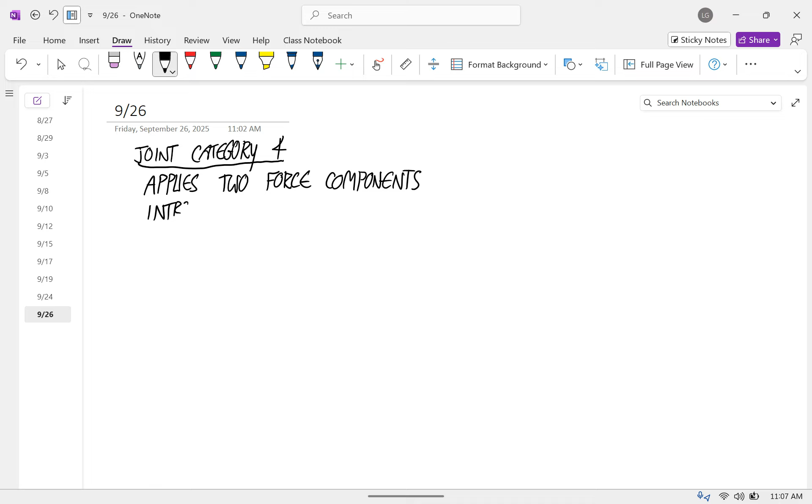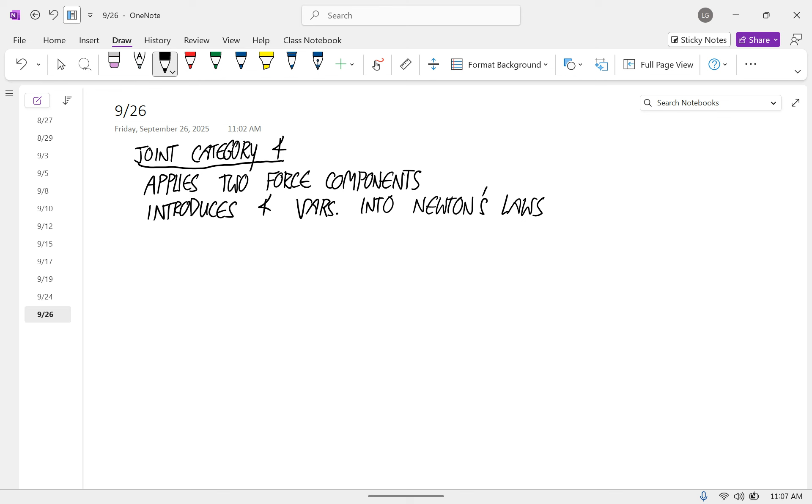And that means that it introduces 4 variables into Newton's laws. And what else was I always saying? That it eliminates 4 degrees of freedom. So it eliminates 2 translational degrees of freedom and 2 rotational degrees of freedom.

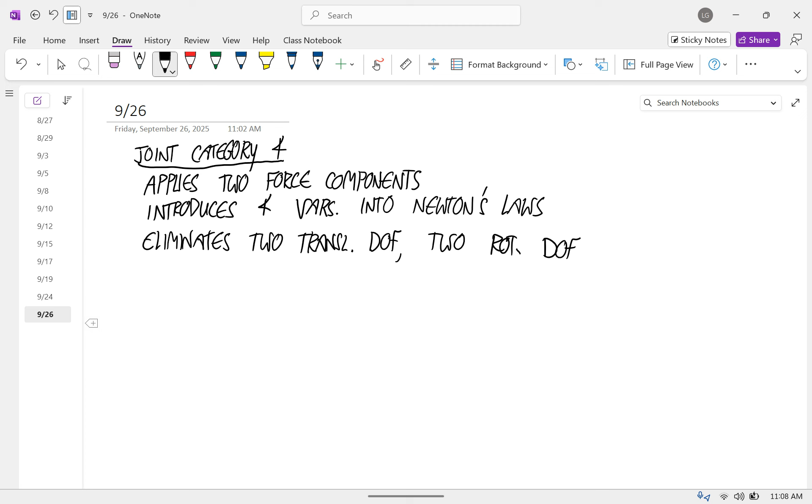And there's only one of these. And it is a pin joint without thrust. And what is thrust? Thrust is a force along the axis of rotation.

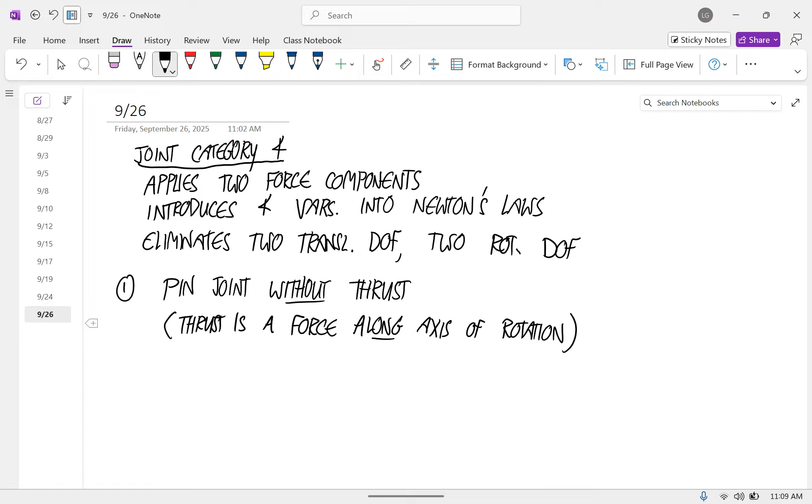Okay, so I'm going to try to draw this. So let's say we have one body like this. Man, I'm bummed out. I used to have a 3D printed one of these, and it made it so much easier to explain what was going on, but somehow I lost it.

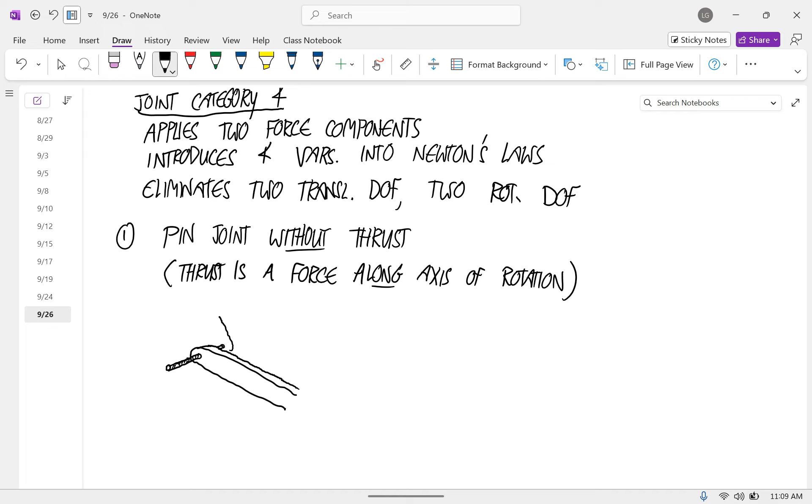Okay, so there's a pin joint without thrust. Let's say this is body 1 and this is body 2. And I've drawn that axis as really long, and I've drawn those so that they're not touching each other. They're only touching the axis. I've tried to make that really explicit in that picture. And so the idea there is that these 2 bodies have some room to slide along the axis.

Okay, so there's no force restricting their motion along that axis. The axis being long and those 2 things being separated like that has the effect of not applying thrust, because they can just slide freely. Remember that forces and couples are only applied when they eliminate motion. So if this motion along the axis is allowed, there's no force there.

And so I'm going to draw a free body diagram of body 1. And it looks like, so there's the body. So this body, think about what, so imagine this two being fixed or whatever. Think about what motions are eliminated by this joint, okay? Can this thing move, let's say the x-axis is sort of this way.

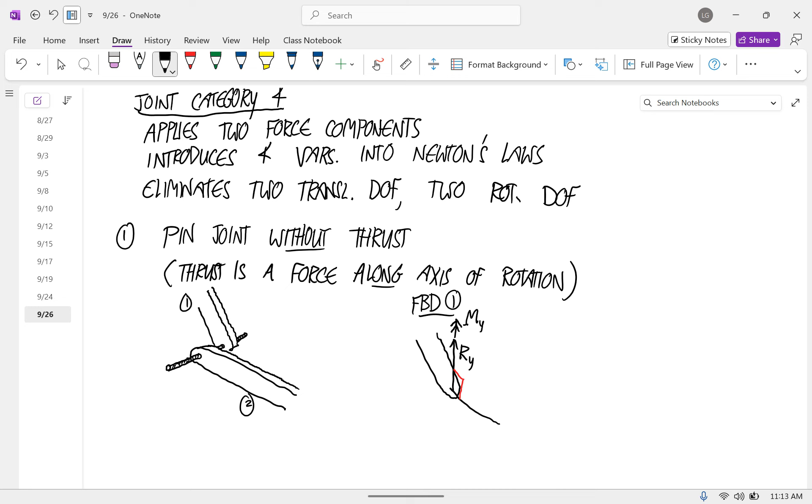Think of the two arrows as indicating the two forces of the couple. Okay, so we'll call this My. And then perpendicular to that along the x-axis, so these are perpendicular. We have a force vector this way, that's Fx, and a couple vector this way, that's Mx.

And then you could also write these with the subscript notations: F12x, F12y. I'm going to make this F, not R, just so it's the same vector. Sorry about that. Okay, so those are the four loads that joint applies. And if you went to body 2, those would be equal and opposite.

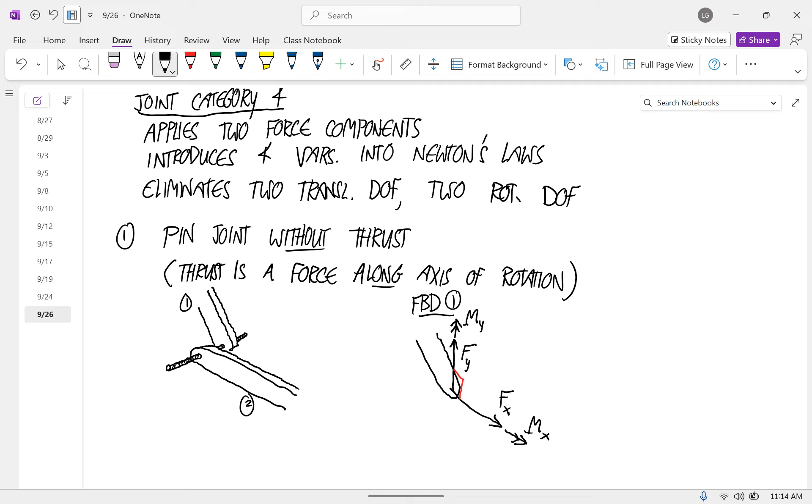There's one important thing about this, and we're going to see this in pin joints with thrust too. And that is, often when you have multiple pin joints in 3 dimensions, you have multiple ones sort of serving the same purpose, allowing motion along the same axis. And when that happens, you don't include those two couples. You only include the forces. And I'll try to explain why that is.

But don't include the two couple components when two pin joints act along the same axis, share an axis.

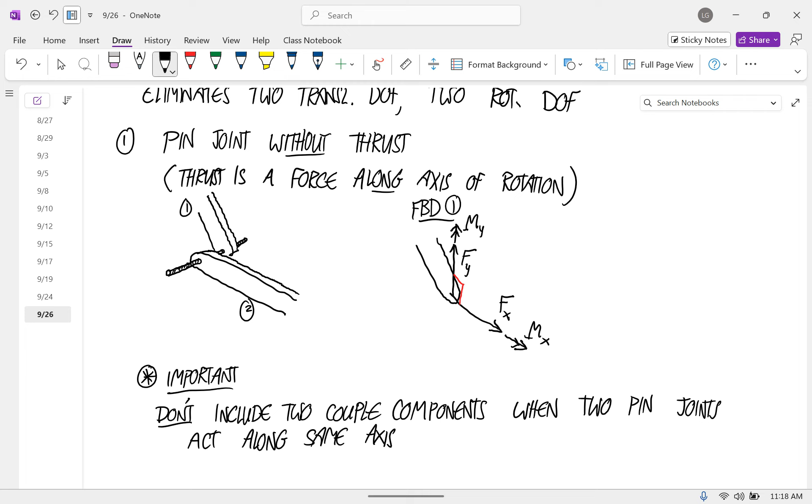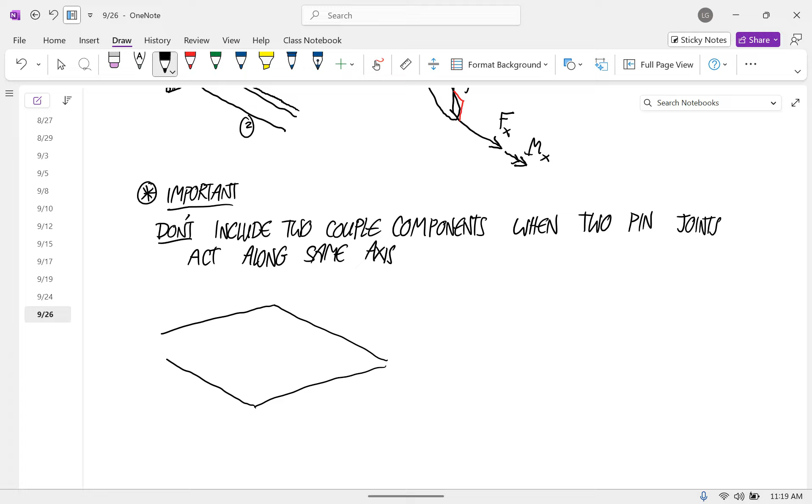So I think the first example we're gonna do... let me draw a picture of what this would look like. So if you had a plate like this, and it was attached to the wall with a hinge here and a hinge here...

Then this is a case where when you drew the free body diagram of that plate, it would only apply forces like this. I'll call this R1X, R1Y, and forces like this, R2X, R2Y. Because those two are acting along the same axis, we wouldn't put the couples in there.

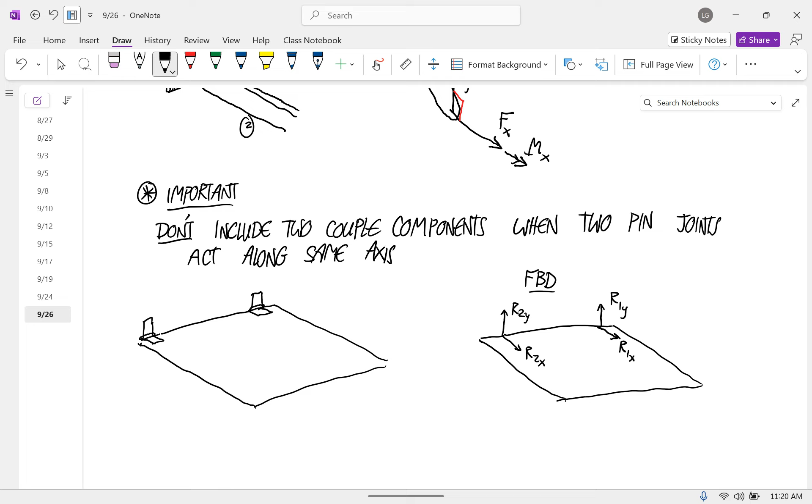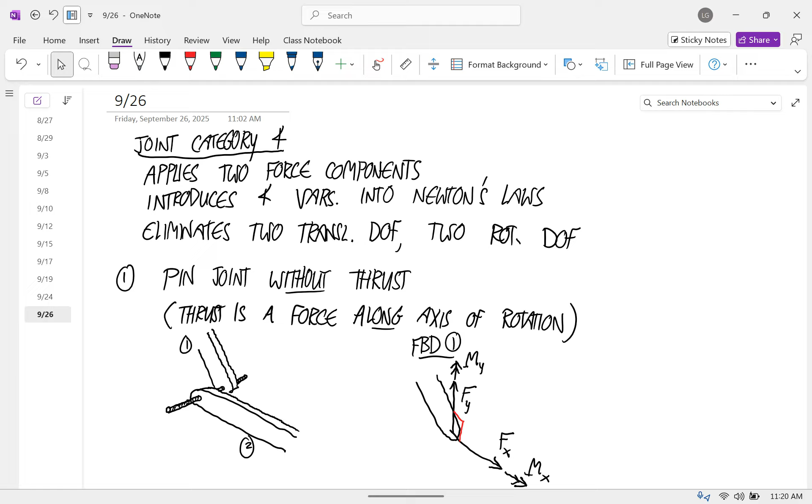Yep, assuming that it might slide. This is assuming that plate can slide. Any other questions? If we're assuming it is not sliding, we would add... not the couple. The sliding is provided by the thrust, and we'll put that in joint category 5. So it's just going to add one more force, because that sliding is a translation, so it has to be a force. Any other questions?

Okay, joint category 5. We're almost done. How do we know that we're almost done? We only have 6 -- there's only 6 degrees of freedom you can get rid of.

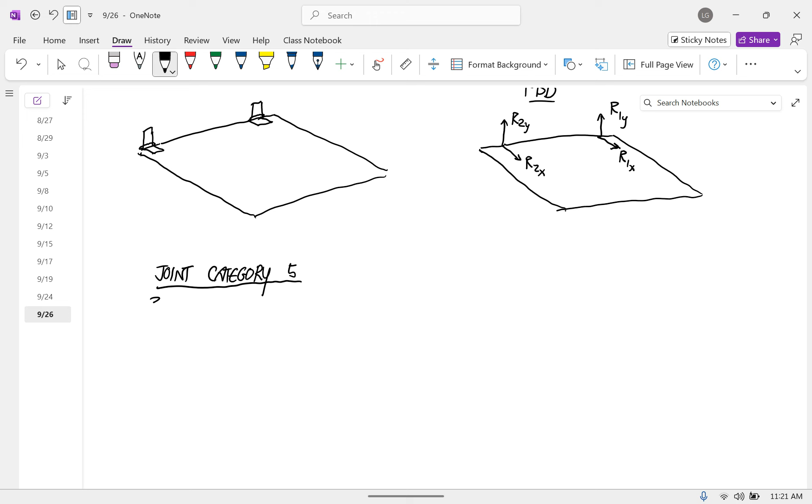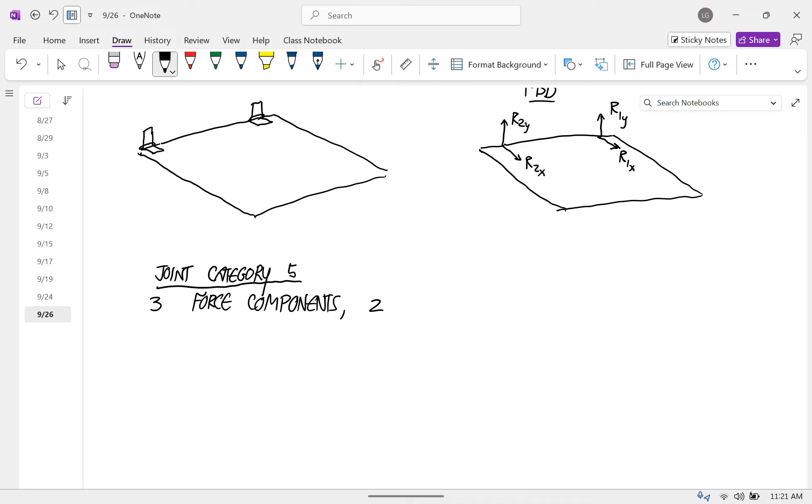So joint category 5. This applies 3 force components and 2 couple components. And that means that it eliminates 3 translational degrees of freedom and 2 rotational degrees of freedom.

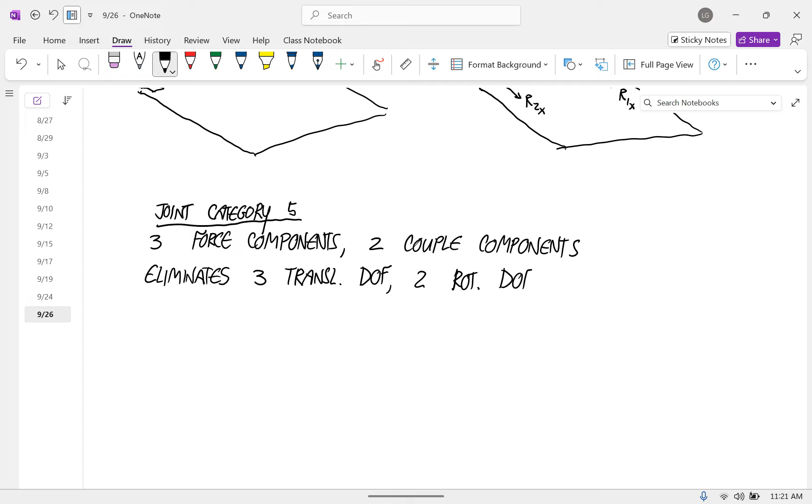Bless you. And it introduces 5 variables into Newton's laws. Okay, that's enough. It's not all about you.

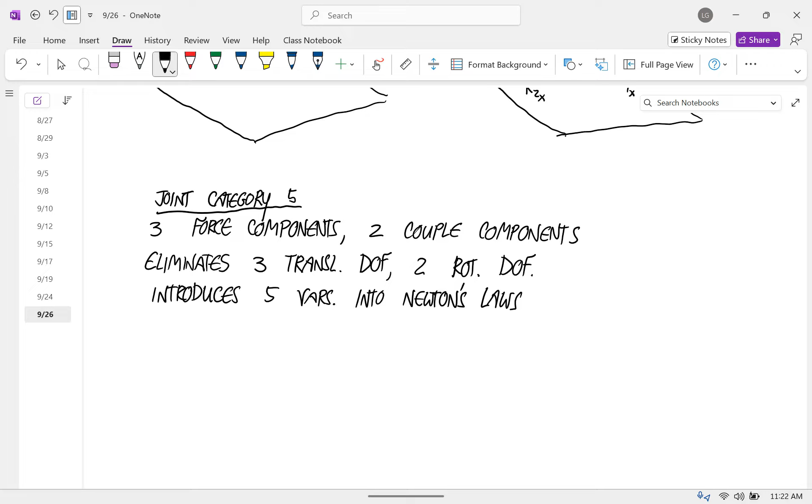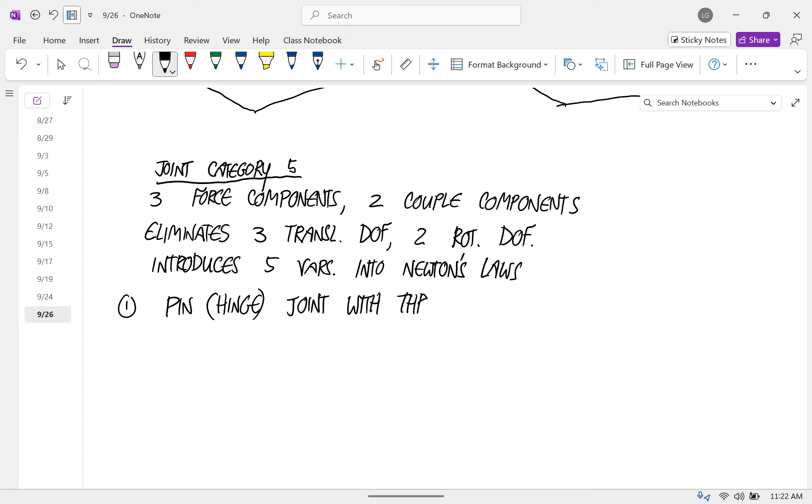Okay, so the one here is a pin or a hinge joint with thrust. Like I said, you can't slide these relative to each other along the axis. And so usually the way thrust is eliminated in a joint is with some kind of flanges on the sides that keep it from moving. So again, bear with me while I try to draw this thing.

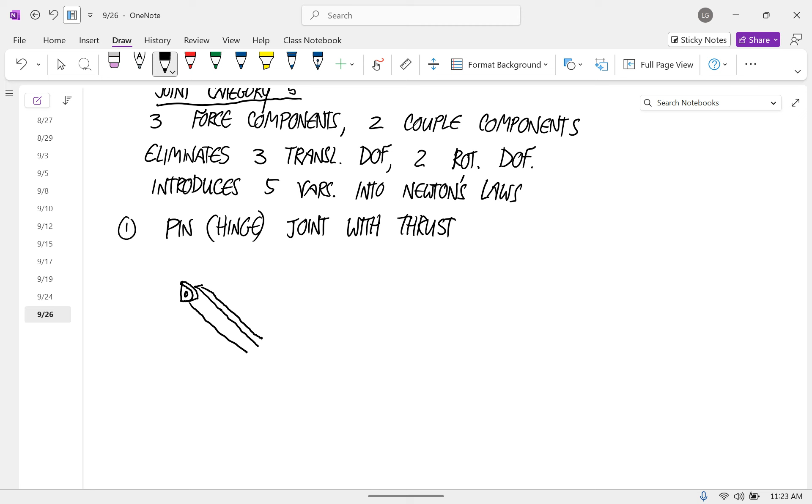So you'd have something like this, and then the body, and then a flange on the other side. Not bad. So this, we'll call that body 1. And so now think about the degrees of freedom that are eliminated by this joint.

This can't translate up or out, so those are 2 force components. This time it also can't translate along the axis, so that's the 3rd force component. In other words, that point that's connected to the pin can't go anywhere -- all of its degrees of freedom translationally are stopped.

And now think about rotations. It's prevented from twisting, so that's 1 couple component. It's prevented from doing this, so that's a 2nd couple component. It's not prevented from doing this, so there's only 2 components of a couple.

And so the free body diagram here -- we would have a force this way, I'll call that Rx. A force this way, call that Ry. A force this way, I'll call that Rz.

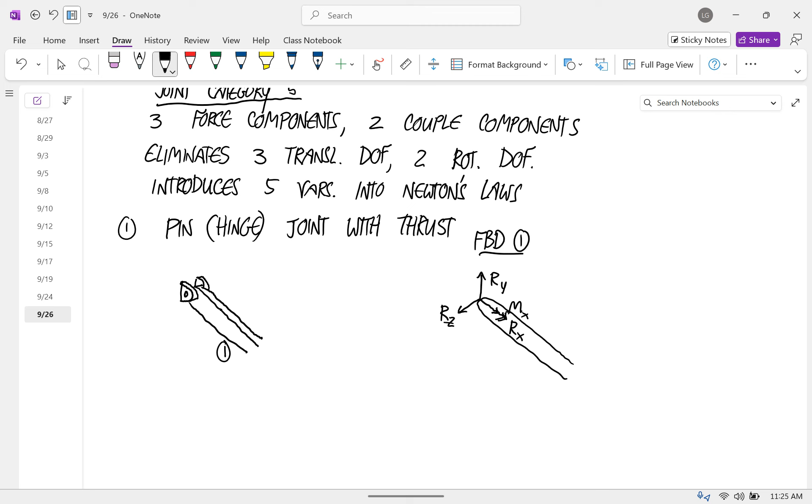And now the couples. Okay, so now the couples, we have one this way, that's Mx. And one this way, that's My.

Usually, instead of drawing all 3 of those force component variables separately, I'll do it like this. So we have the body, we have a full force vector there, so I'm just going to call that the R vector. That has 3 components, and then the couple components, mx and my.

Yes, for those sort of Christmas tree arrows, the moment that they're restricting, we get from the right hand rule for their direction. You just always draw them in the direction of the positive axis. If you get a positive value of this, the rotation is determined by the right hand rule, so it rotates around the Christmas tree arrow. For that X arrow it would be like this. That's something you're just going to have to get used to for all rotational quantities. The rotational quantity's vector component is your thumb, but the rotation is from the right hand rule.

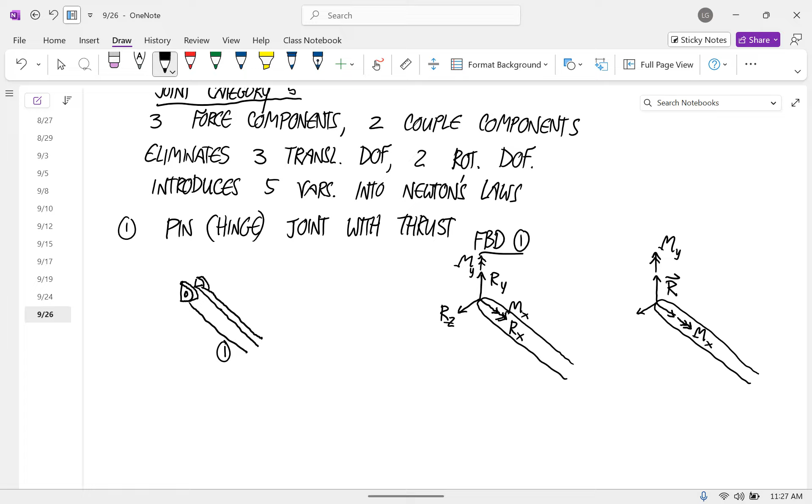And with this one, same thing as before. This is an important fact about these, like the door hinges thing. If you have two coaxial pin joints that share an axis, then you don't include those couples.

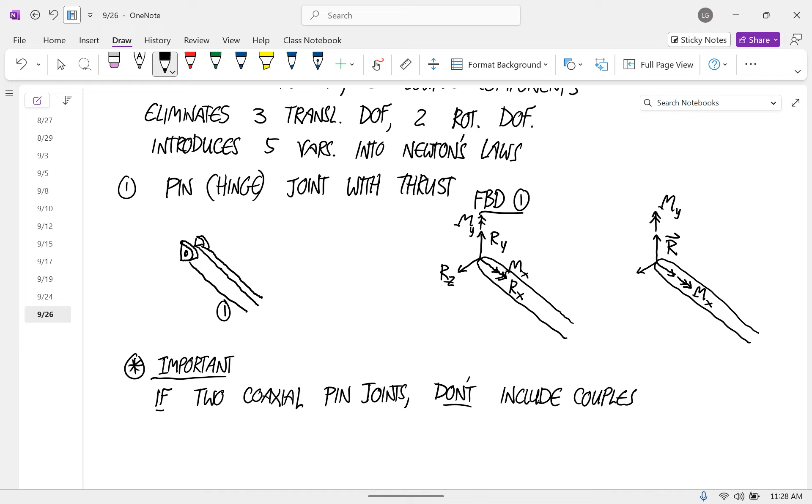So for example, let me draw the same thing again. Let's say we have a plate, and there's a hinge over here and a hinge over here. And let's say that this one provides thrust, and this one provides no thrust.

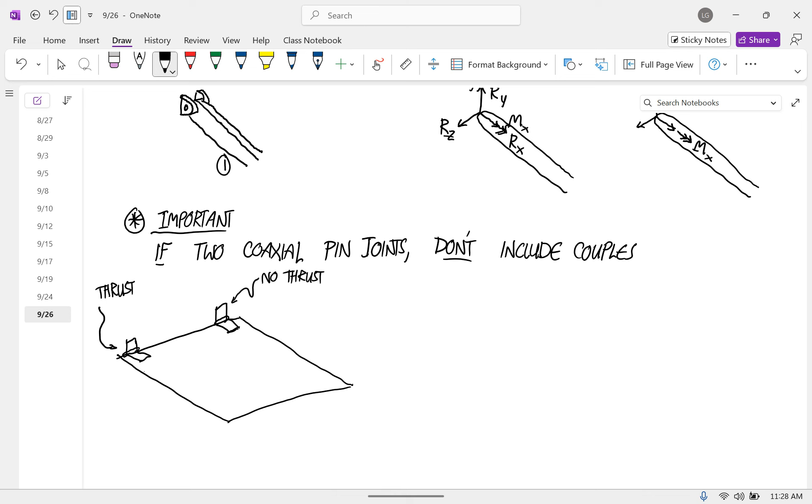Then a free body diagram of this would look like: there's the body. The one with thrust would look like this, so there's a full unknown force vector, I'll call that R1. And then there's two - these share an axis, so there's no couples on this. And then over here, this one has no thrust, so all we have is R2X, R2Y.

And in problems, they're never both going to have thrust included, because then you'd have, for your Z component of Newton's second law, two unknowns and there'd be no way to get to those - it would be statically indeterminate. So with stuff like this, at most there's going to be one of these two joints sharing an axis that has thrust.

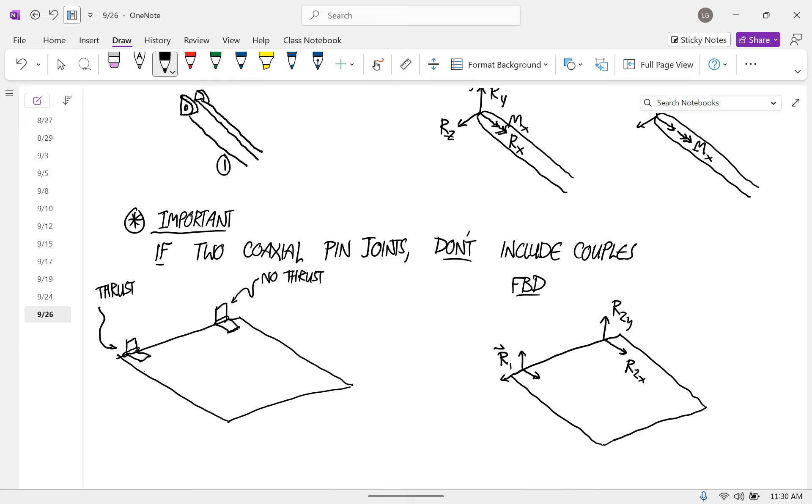Okay, and now the easy one, joint category 6.

For category 5, we don't draw the moment on those two vectors, but they're going to generate a moment together if we try to rotate it. So what happens is when you use Newton's laws and say that this is in static equilibrium, this allows you to calculate what the forces are that provide that moment. So this is all you need in your equations.

Go over thrust again - thrust is just whether the two things can move along their axis or they can't. Right now, my two arms sharing this pen is like a pin joint between them, but there's nothing keeping this hand from sliding back and forth along the pin, so that's no thrust. Whereas this one, I can't go right or left because these flanges hold these in place, so that one provides thrust. It's a way cooler sounding word than what it does - it just keeps it from moving along the axis.

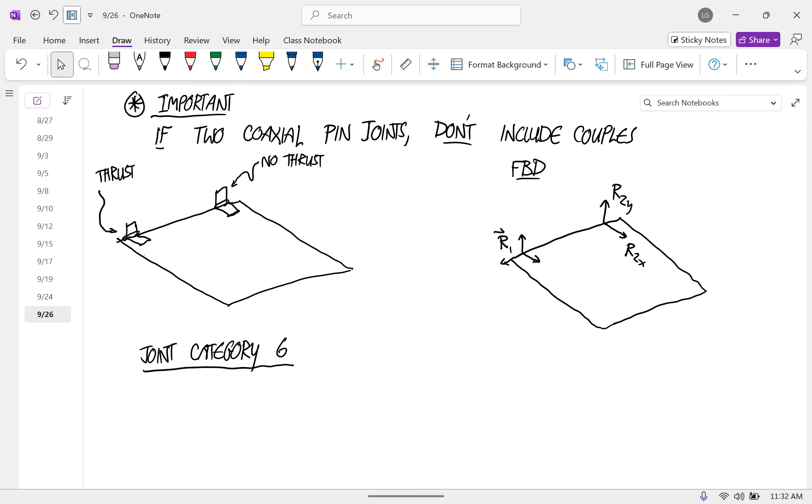Okay, so joint category 6: this is 3 force components and 3 couple components.

So this eliminates all 6 degrees of freedom. The two things are just locked together.

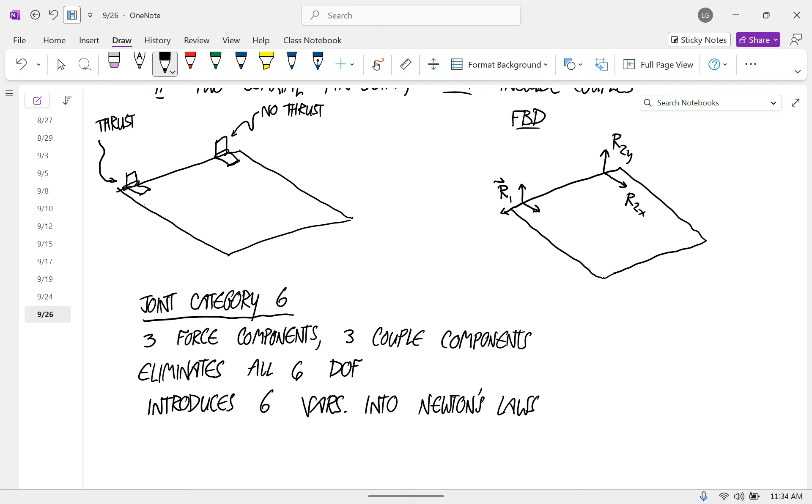And this introduces 6 variables into the equations, six variables into Newton's laws. And since Newton's second law and the rotational Newton's second law only give you 6 equations, that's the most variables you can solve for. So if you have a thing that's being held in place with a fixed joint, a cable, and a pin joint, you can't use statics to solve for those, because that's a lot of variables—6 plus 1 plus 4 or whatever—you only have 6 equations and you have 11 variables.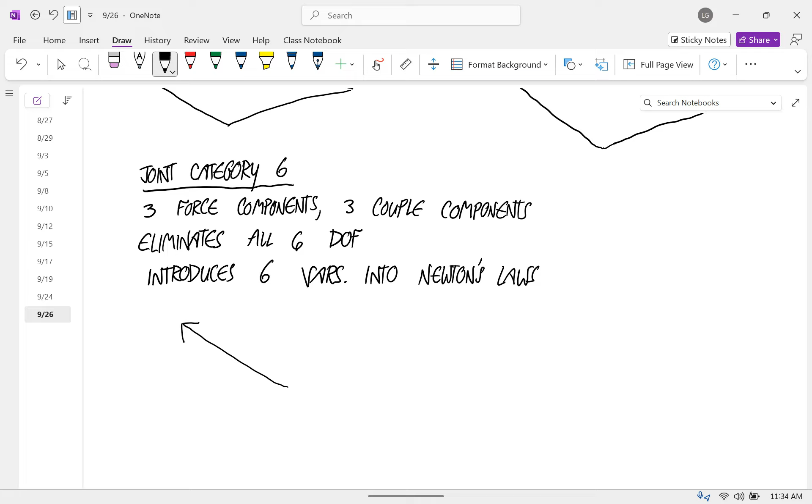Okay, so this one looks like this or whatever. That beam there is just locked in place by a weld, glue, or a bunch of fasteners.

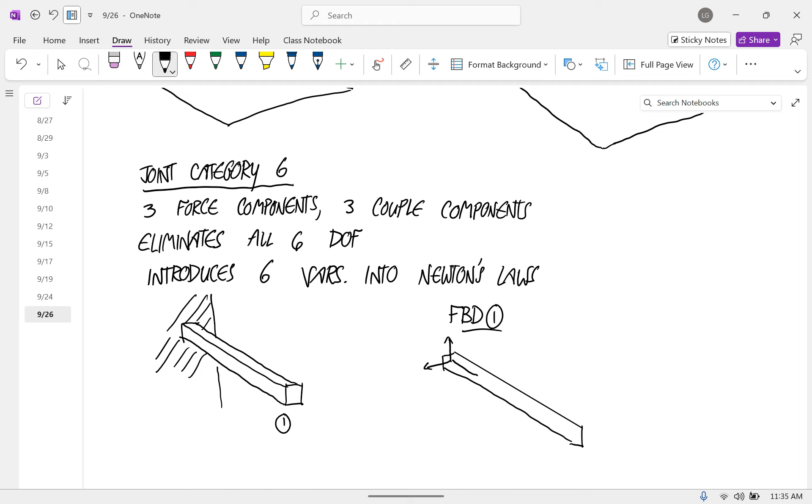And a free body diagram of that body 1—I like when it makes that line straight for me—the free body diagram would look like this. So 1, 2, 3 force components, and 1, 2, 3 couple components.

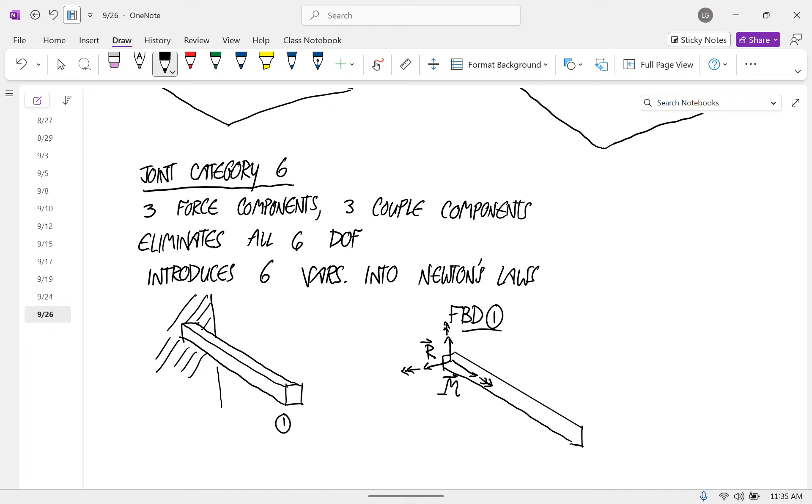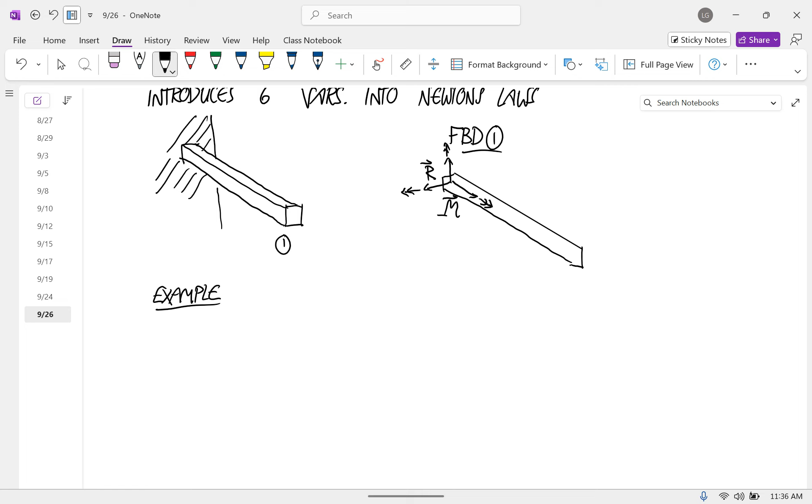Okay, let's do an example problem. So let's say we have a big plate... okay, so you got this plate, and it's connected to the wall by a ball and socket joint. It's not very clear from that picture, but you just have to believe me that that's a ball and socket joint.

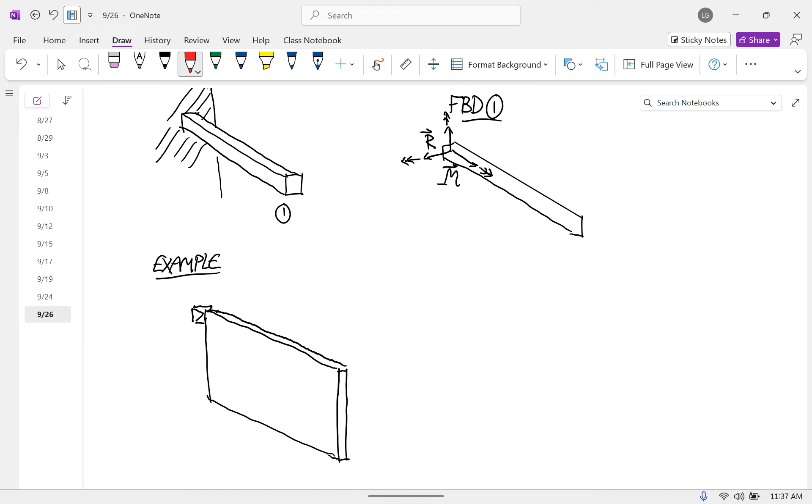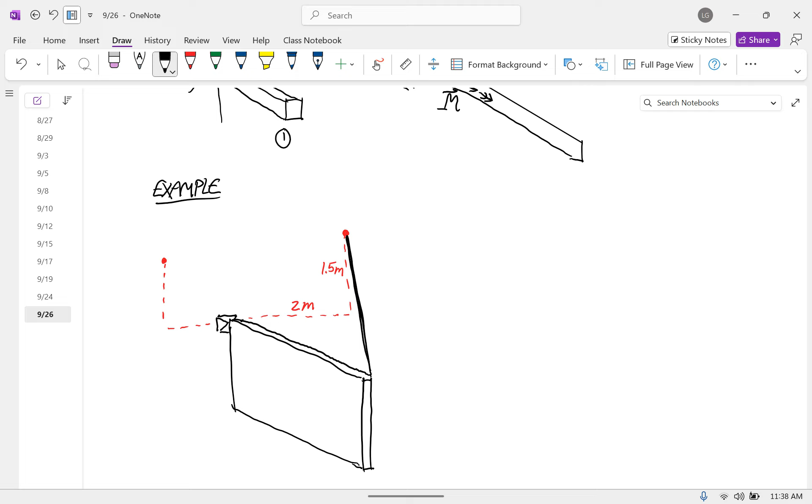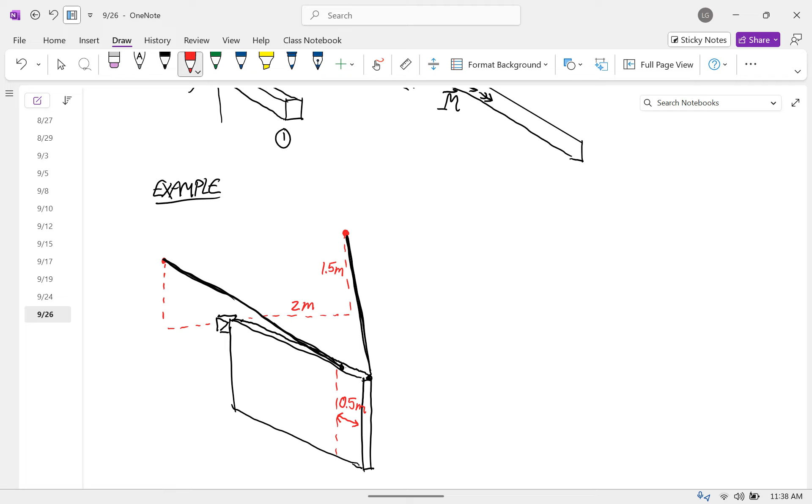And it's held in place also by two cables. So one goes—we're going to go 2 meters here and 1.5 meters up on the wall—and so we have one cable that goes like this from the end. And then a second cable that goes 1 meter to the other side and 1 meter up, connected to a second point by a cable. This distance from the end to that second attachment point is 1/2 meter, and the distance from that second attachment point to the other end is 2 meters.

So this whole thing is 2.5 meters long, and the height is 1 meter. The mass of this thing is 50 kilograms. We want to know what are the cable tensions and the reactions at the joint.

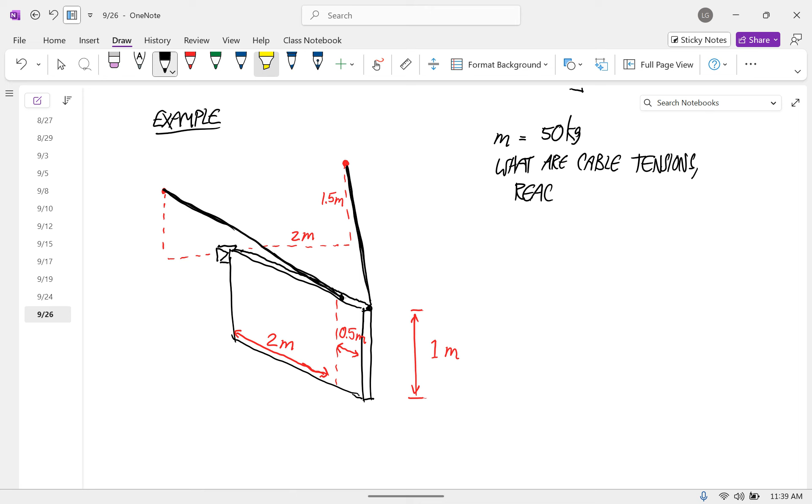So can everybody make sense out of that drawing there? Those cables are both attached to the wall, the same wall that the ball and socket joint is attached to. I'm going to use a coordinate system, so the first thing I'm going to do is come up with coordinates for all these key points in this problem. Here's the x-axis, here's the y-axis, and here's the z-axis.

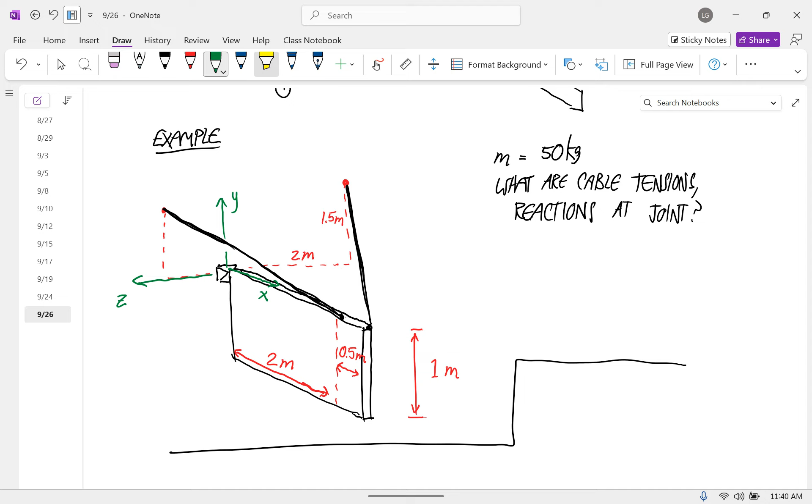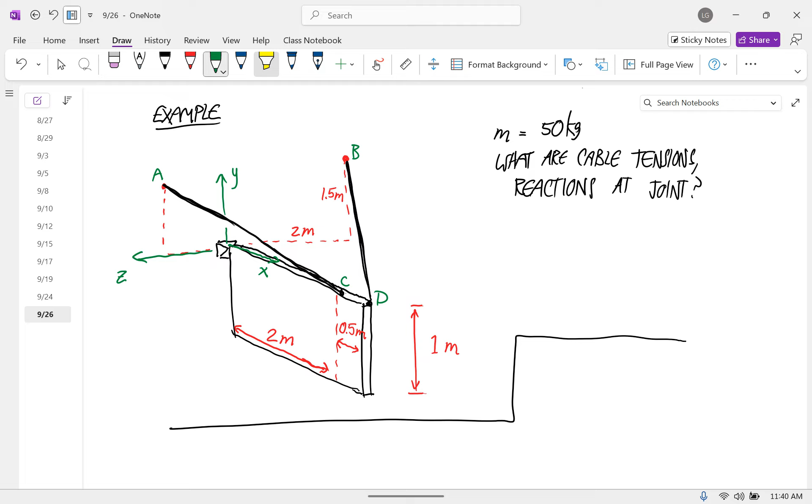And I'm going to label these points so we can find these locations. The ball and socket joint is at the origin. I'm going to call this point A, this point B, this point C, and this point D. And I guess we're also going to have to include the weight, so let's make the center of mass of this rectangle point E. The first thing I'm going to do is figure out the coordinates of those points.

Notice that if I make my about point—when I get to calculating the moments and stuff—if I put my about point at the origin here, then the coordinates of all these points are also the position vectors where those forces are acting. So in these complicated problems where coming up with the coordinates is a little bit of a hassle, put your origin at the same place that you put your about point. It just makes you not have to do all the subtractions and stuff.

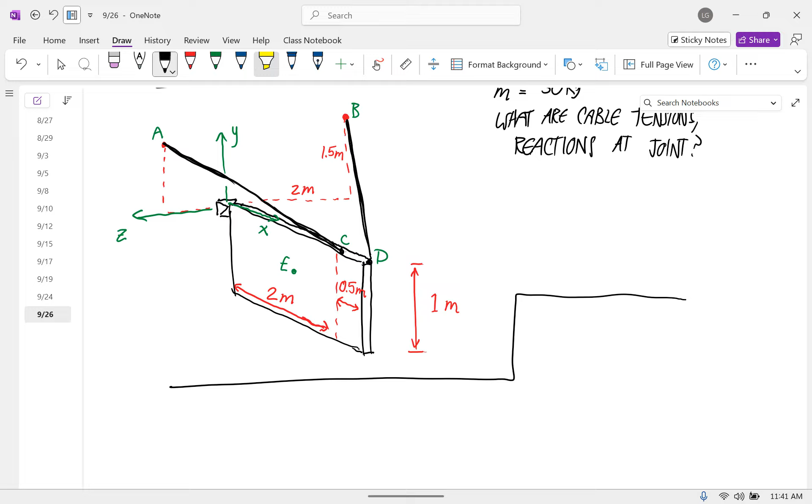Okay, so the point A—the coordinates are, I didn't label these—this is 1 meter, and this is 1 meter. So to get from the origin to A, you have to go 1 meter in the positive Z, 1 meter in the positive Y. So this is 0, 1, 1.

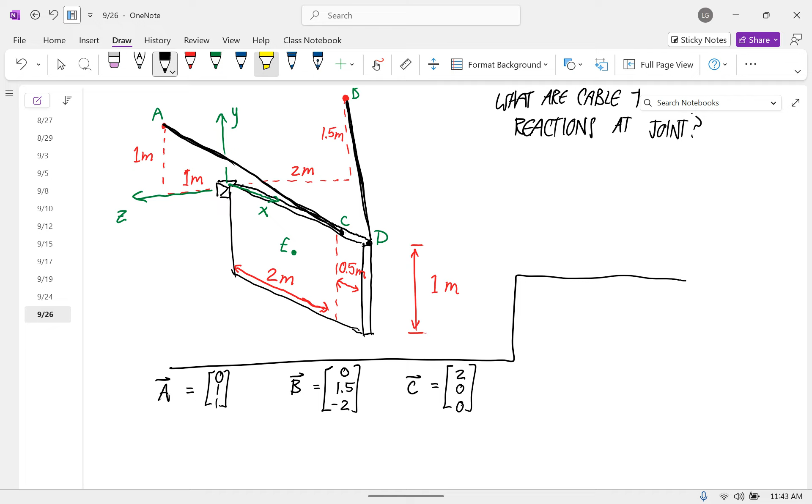The point B: you have to go 2 meters in the negative Z, and then 1.5 in the positive Y, so 0, 1.5, negative 2. The point C, all you have to do is go 2 meters in the positive X. The point D, go a little farther in the positive X, so this is 2.5, 0, 0. And finally, the center of mass: the whole thing has a length of 2.5, so it's going to be a distance of 1.25 along X, and the height is 1, so it's negative 0.5 along Y, and then 0 for Z.

And now I'm going to draw the free body diagram.

There's a weight force coming from the center of mass. That's 50 times 9.81, so 490.5.

There is a cable going this way, I'll call that TB. And then from this point, there's a cable going in a different direction, I'll call that TA.

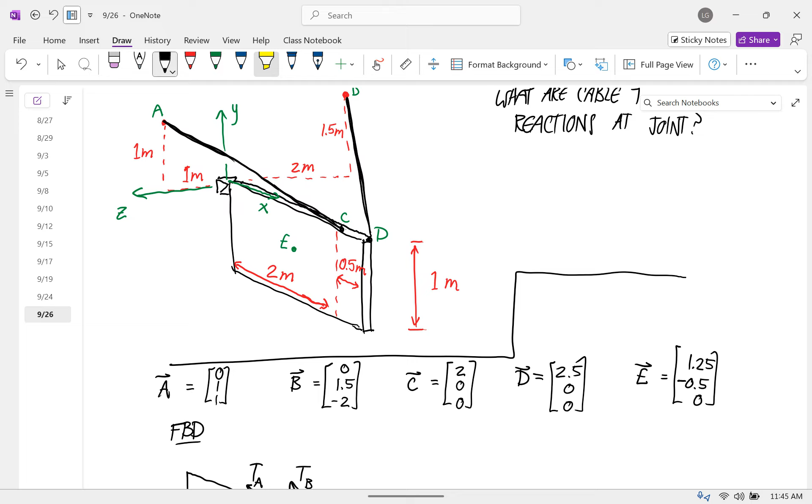And that's what it says in your notes from last time. So I'm going to put this in as an unknown vector, and I'll call this R.

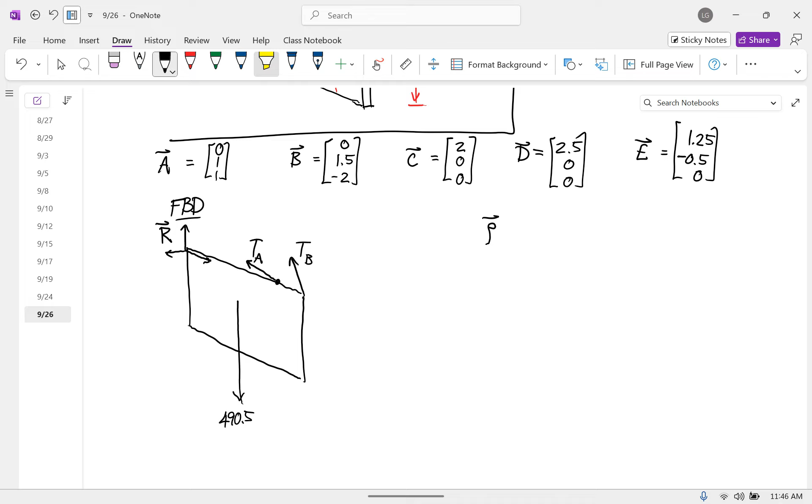And now, just like we did in 2D, I'm going to just write out this table. The only difference between the table in 2D and 3D is that in 3D, in general, none of the components are 0 on any of these vectors. So we got rho, force, moment.

I'll start with R. And in red, I'm going to put my about point, which, like I said, I'm going to keep it at the origin. That's going to mean that forces that are applied at any of these points, A, B, C, D, E, their rho vector is just going to be their coordinates that we already know. Because the rho vector is from the about point to the point where the force is applied. So if your about point is the origin, that's always just the coordinates of where the force is applied.

So R, what's the rho vector? 0, 0, 0. Yep, 0, 0, 0. Force vector is Rx, Ry, Rz. Cross product is 0, 0, 0.

Then I'll go for the weight force. The rho vector, that's the point E, so the rho vector is 1.25, negative 0.5, 0. The weight is 0, negative 490.5, 0.

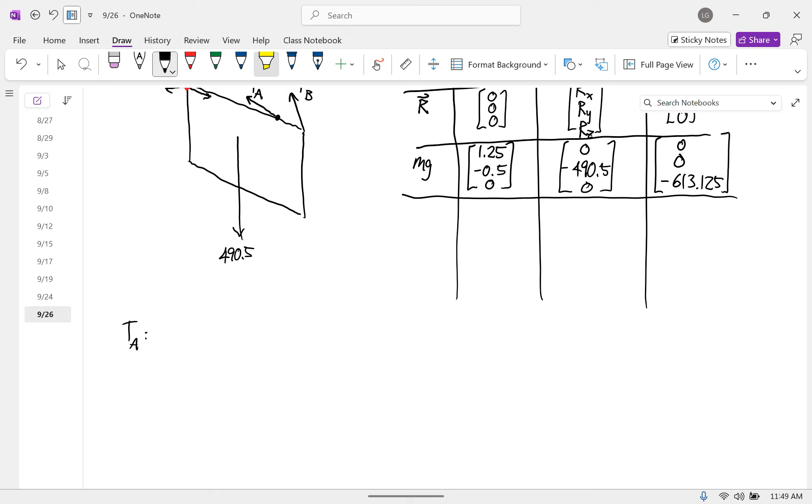And now we have to get to those cable forces. Okay, so now there's a little bit of work to do for those cable forces. What we have to do is figure out a unit vector in the direction of each one of those forces, and then multiply it by the variable. So for TA - wait, are we going to be given the angle or not? Nope. In 3D, really, the angles don't mean much because you'd need them in multiple planes, you know?

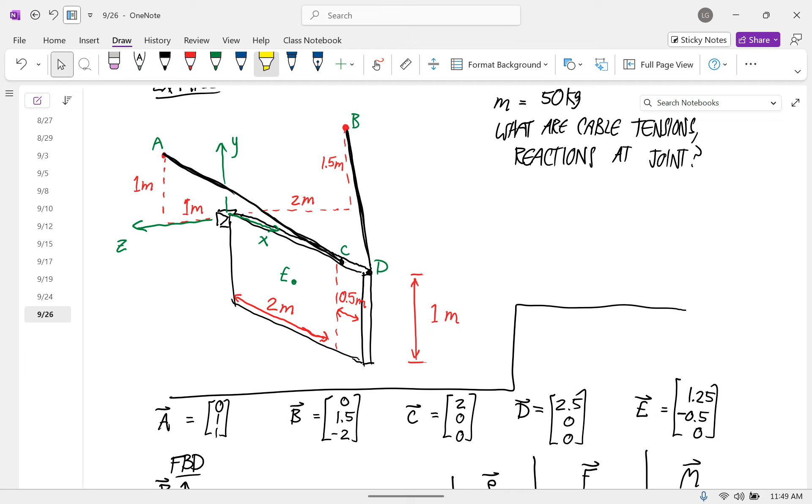So what we're going to do instead is we're going to take, like for TA, the coordinates of A minus the coordinates of C, and then calculate the unit vector in that direction, and then multiply by the variable. So the vector is A minus C. But this isn't a unit vector. So this is 0, 1, 1, minus 2, 0, 0. So that's negative 2, 1, 1.

Then the unit vector - my calculator will just do that with the unit V function. So that's negative 0.816, positive 0.408, positive 0.408.

And so the force vector is negative 0.816 TA, positive 0.408 TA, positive 0.408 TA.

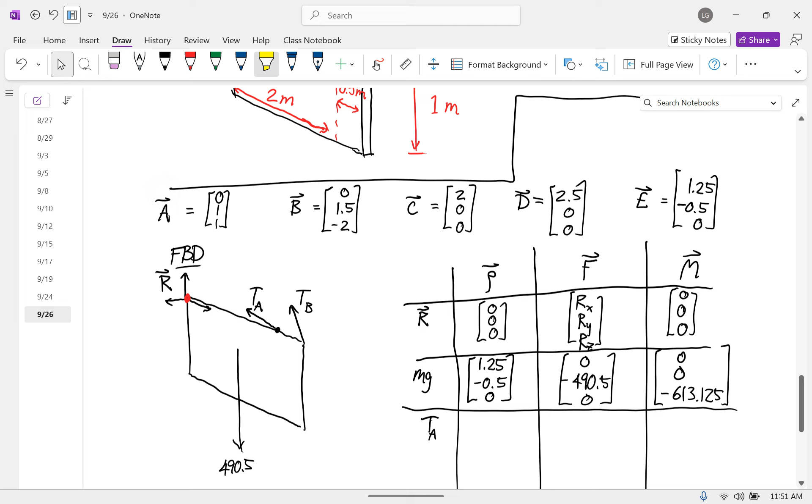Okay, so for the force TA, the r vector is just the coordinates of C. So 2, 0, 0.

The force vector is negative 0.816 TA, positive 0.408 TA, positive 0.408 TA. And I'll take this cross product. I can just do it without the TAs on, and then I know all my components are multiplied by TA. It's like pulling a constant out of a multiplication.

And so our moment vector is 0 for x, negative 0.816 TA for y, and positive 0.816 TA for z.

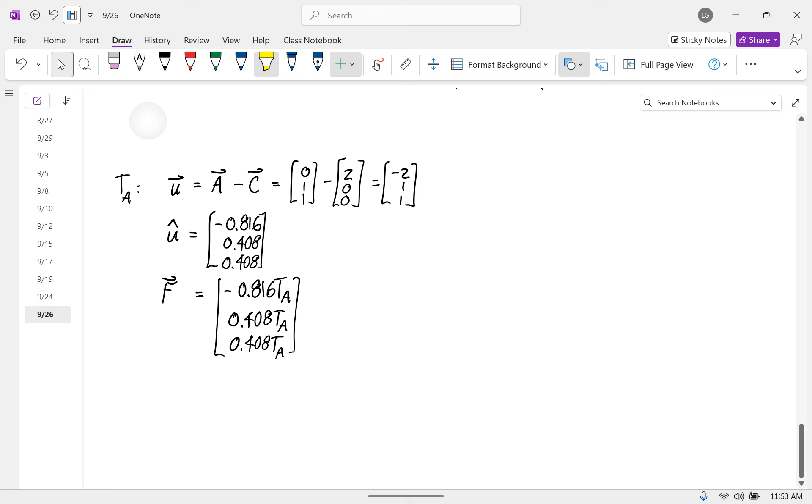Oh my gosh, we're over already. Let me just finish the table, and then I'll describe what to do, but we'll finish next time. So then TB... well, let's finish next time.

I have a question. Is there a way - you said you put the unit vector in your calculator? Yeah. Do you have a program for that on D2L? It's probably on there somewhere, maybe in that textbook document. Yeah, look in there and see if it is. But if you have an Nspire or an 89, it's a built-in function. Oh, it's a built-in function? Yeah, called unit V.

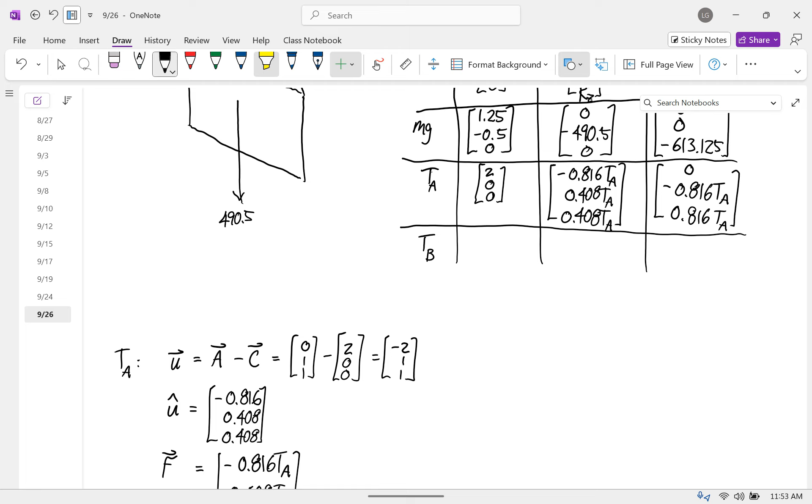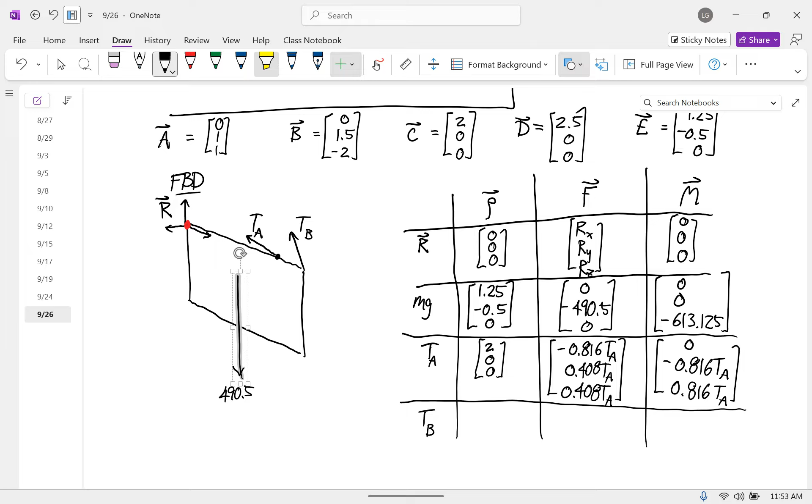And so anyways, now that once you have the table, add up all the vectors for F, set it equal to 0, add up all the vectors for M, set it equal to 0, just like in 2D.